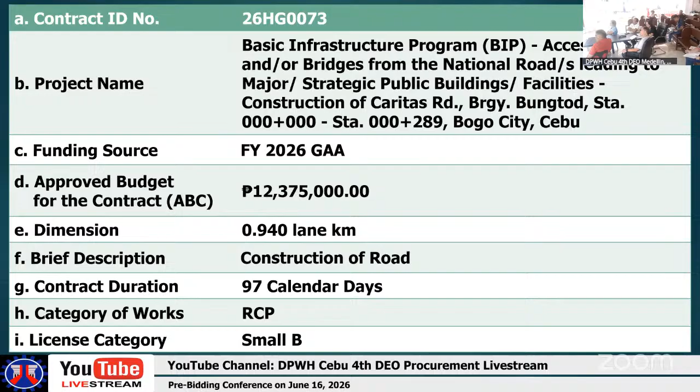Good morning everyone. Summary of quantities: Part A, Facilities for the Engineer; Part B, Other General Requirements; Part C, Earthwork; Part D, Sub-base and Base Course; Part E, Miscellaneous Structures; Part G, Drainage and Slope Protection Structures; Part H, Miscellaneous Structures. Next is the drawing.

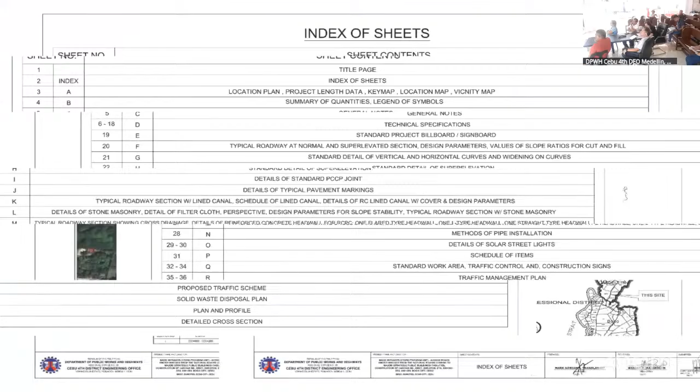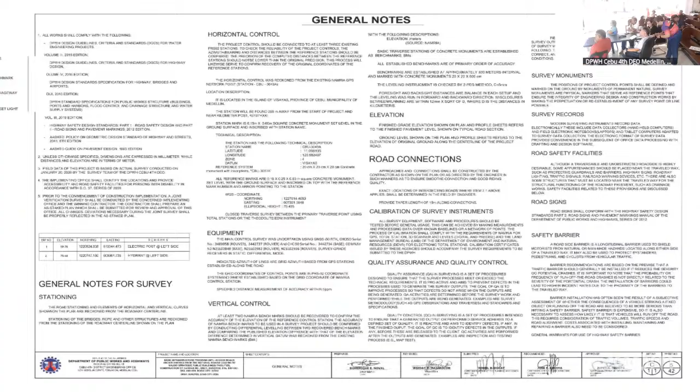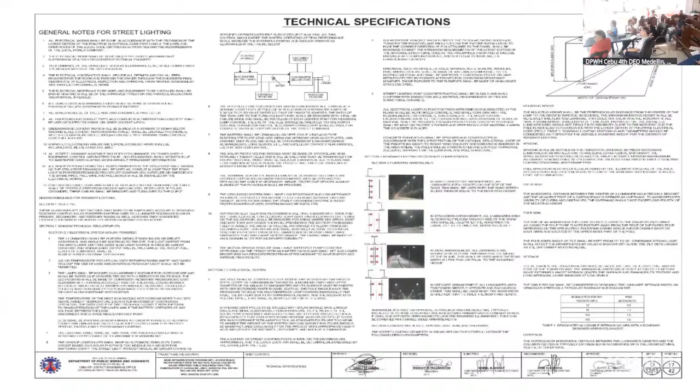First page is the title page. Next is the index of sheets, the location plan, the summary of quantities, general notes, and the following technical specifications. Next is the standard billboard, then the typical roadway, and typical pavement marking details.

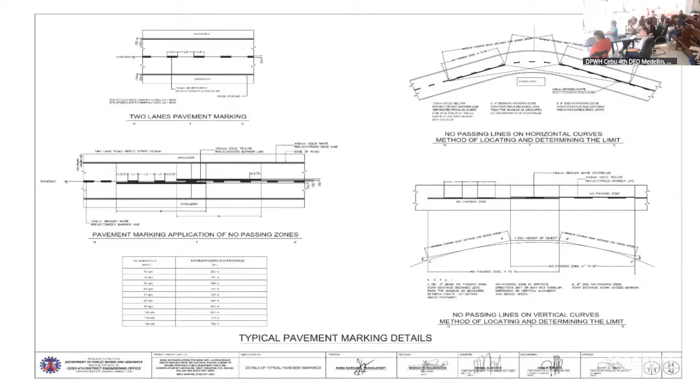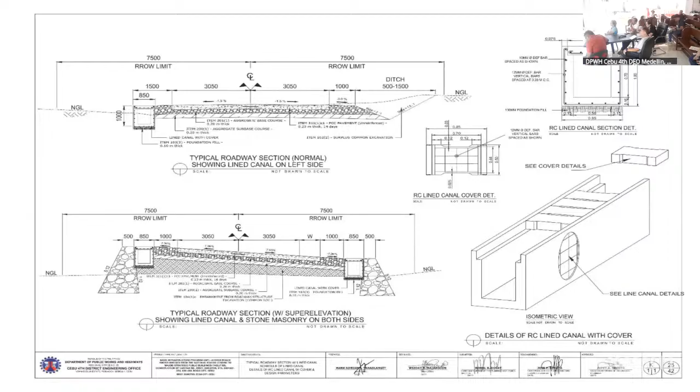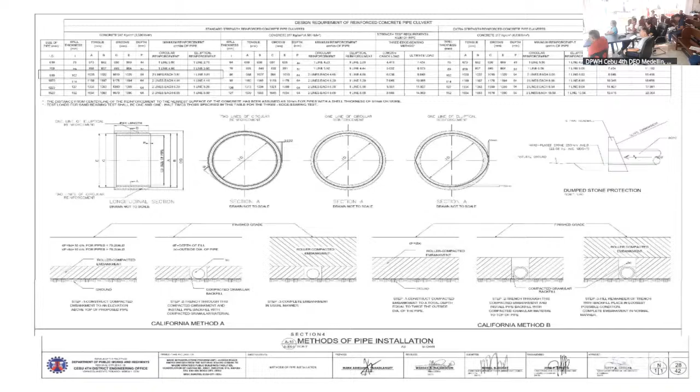The typical details of the stone masonry lined canal. Next is the stone masonry, then the head wall of the cross drain, and the street light typical and details.

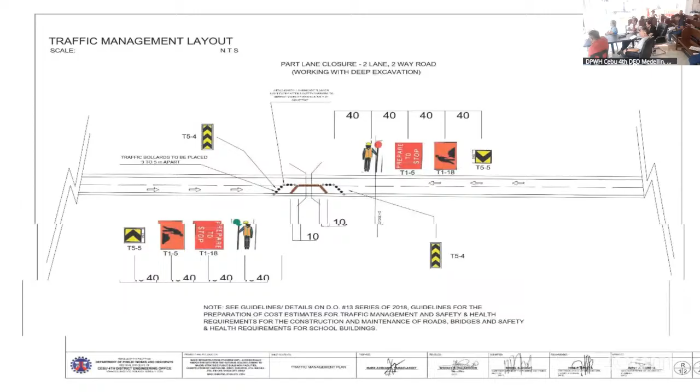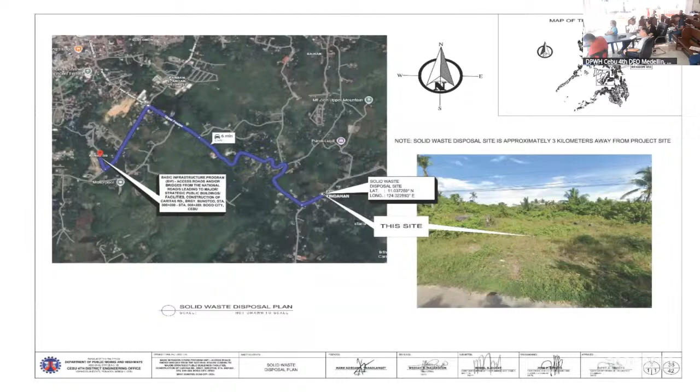Then the schedule of items, regulatory signs, the traffic management layout, the proposed traffic scheme, and the disposal waste plan. Finally, the plan and profile, and the cross-sections of the project.

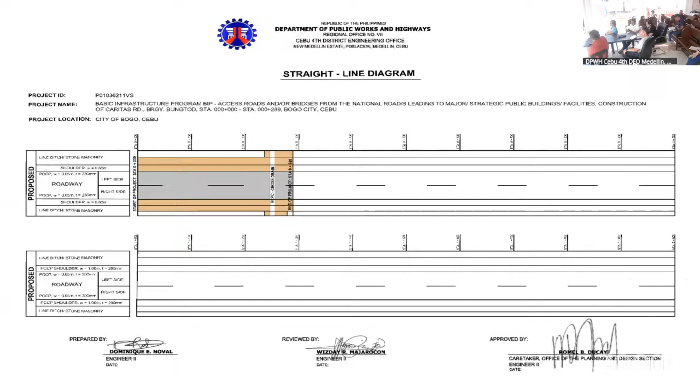Next is the straight line diagram. That's all for the drawings.

Next is the equipment requirements. First is 2 units of two-way radio, 8 units of barricade flasher light, 1 unit of low-bed trailer with prime mover, 1 unit of backhoe, 2 units of dump truck, 1 unit of bar cutter, 1 unit of bulldozer, 2 units of payloader, then 1 unit each of: motorized road grader, vibrator roller, water truck, and 2 units of concrete vibrator, 1 unit each of: concrete screeder, concrete saw, bar cutter, joint crack sealer machine, bar bender, cargo truck 9 to 10 metric ton capacity, 1 bagger mixer, bar cutter, plate compactor, backhoe wheel type, cargo truck 2 to 5 metric ton capacity, applicator machine, kneading machine, bar bender, truck mounted crane, straight boom lift telescopic.

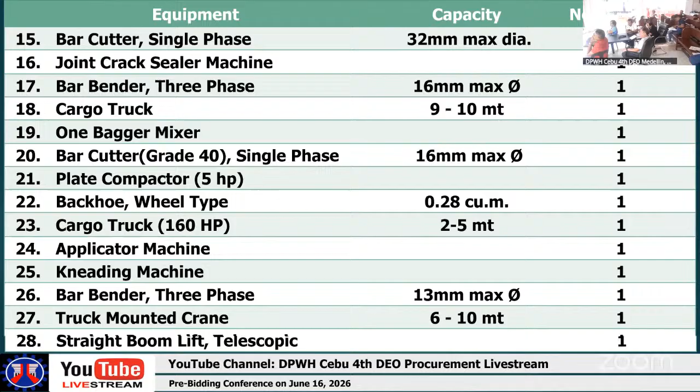Then that's all for this project.

For project profile number 2, to be presented by Engineer Renato J. Catino.

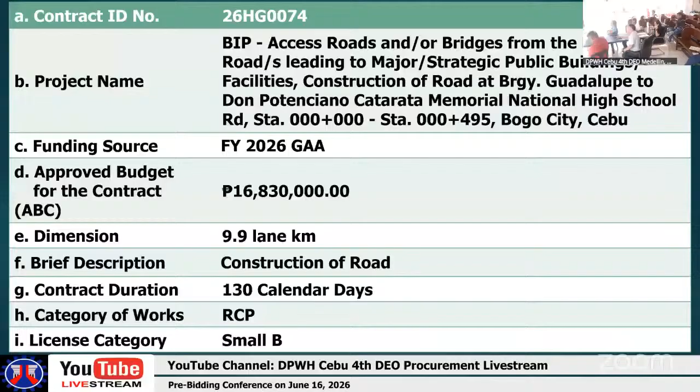Summary of contents: Item number, Part B - other general requirements, Part C - earthwork, Part D - subbase and base course, Part E - surface courses, Part G - drainage and slope protection structure, Part H - miscellaneous structures, drawings.

Title page, location map, summary of documents, general notes, technical specifications.

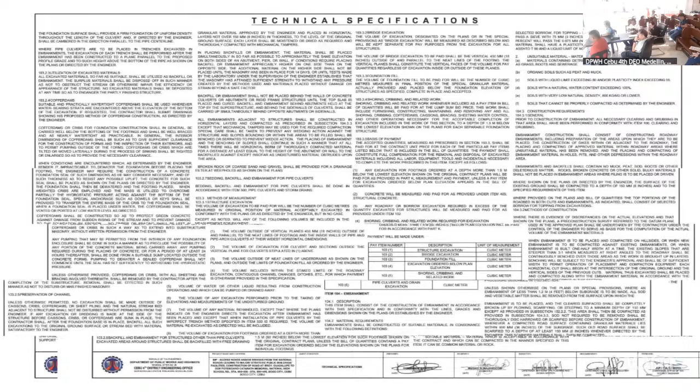Schedule of items. Typical roadway section. Details of stone masonry. Standard details of pavement markings. Standard masonry drawing.

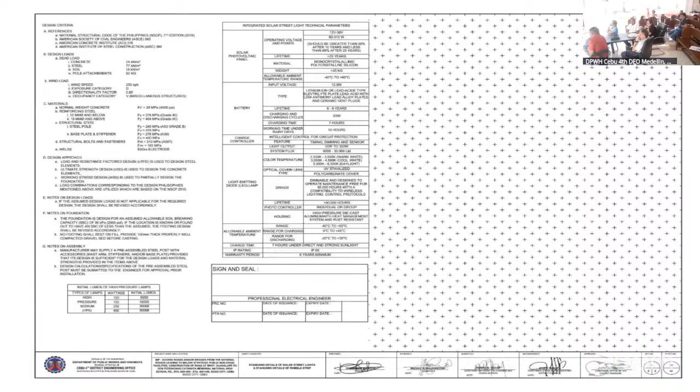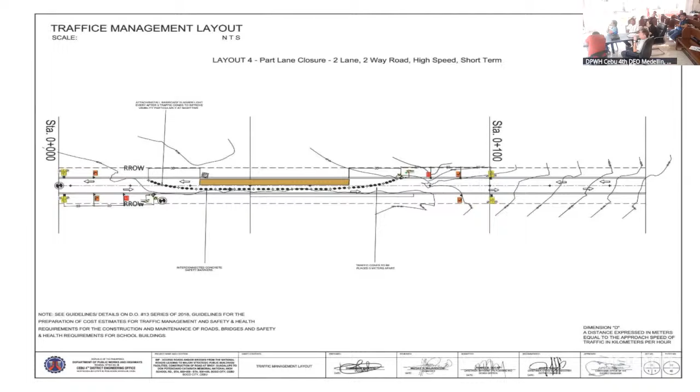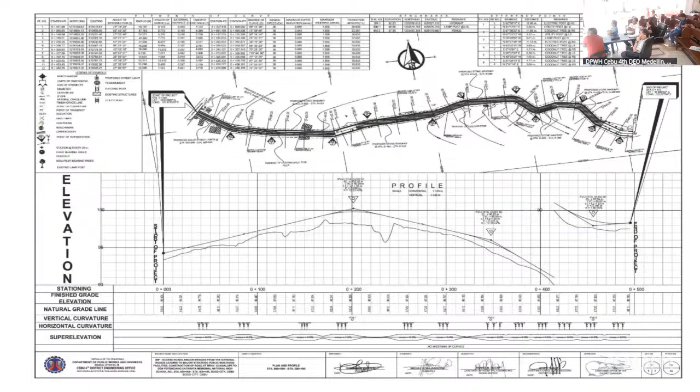Straight line diagram. Equipment requirements.

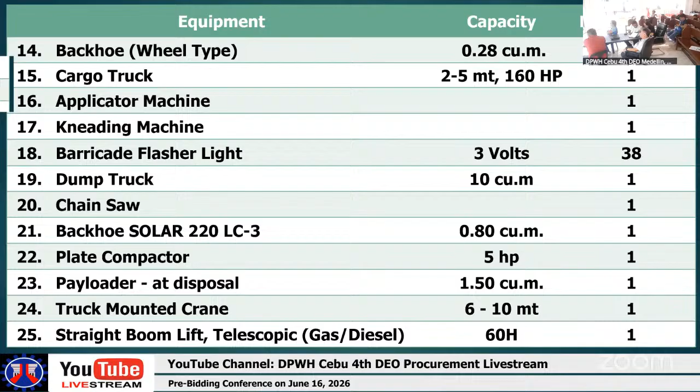1 unit backhoe, cargo truck, applicator machine, kneading machine, barricade flasher, dump truck, chainsaw, backhoe solar, compactor, payloader at disposal, truck mounted crane, straight boom.

For project profile number 3 to be presented by Engineer Marinito Yin.

To be discussed in details by Engineer Clark Brgy.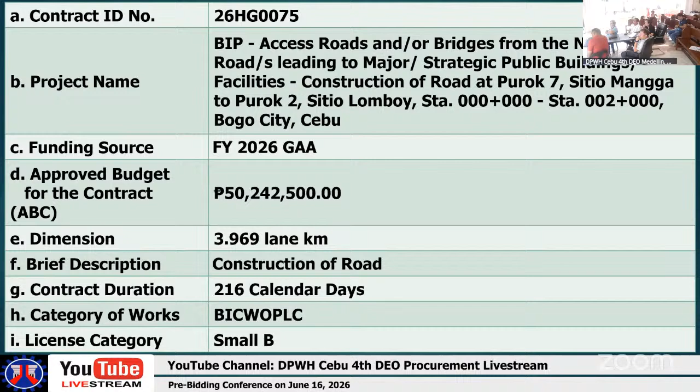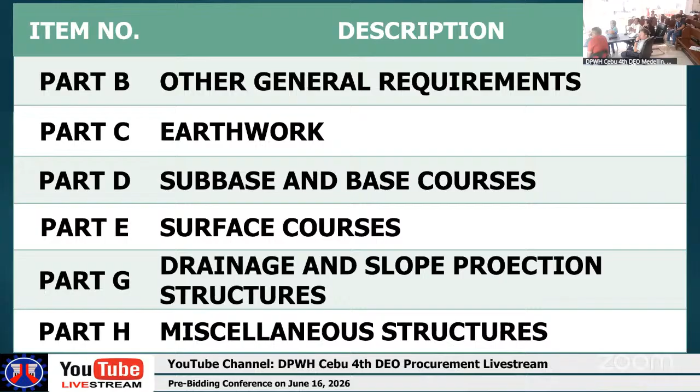Summary of contents: Part B - other general requirements, Part C - earthwork, Part D - subbase and base courses, Part E - surface courses, Part G - drainage and slope protection structures, Part H - miscellaneous structures, drawings.

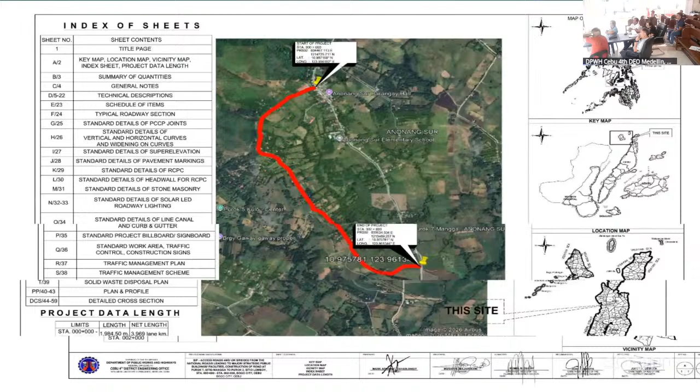Title page, index of sheet, location map, project data, then summary of quantities, general notes, and the following are the technical specifications.

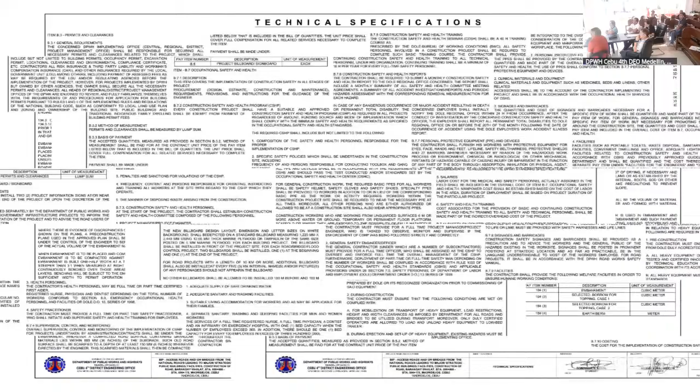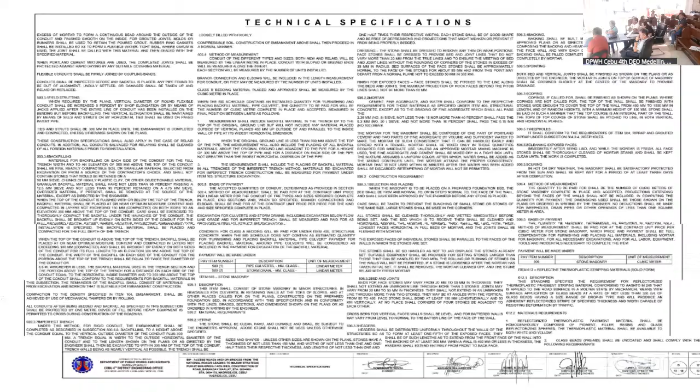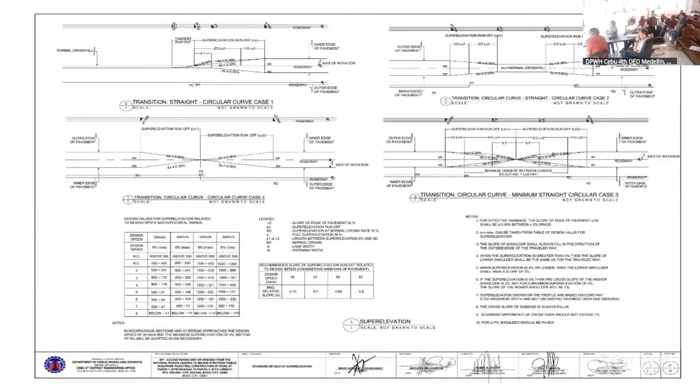Schedule of items. Typical road section. Standard details of PCCP joint. Standard details of vertical and horizontal curves. Standard details of super elevation. Standard details of pavement markings.

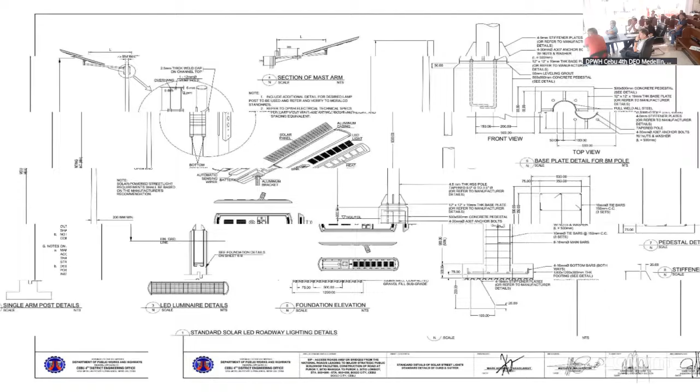Standard details of RCPC. Standard details of stone masonry. Standard details of street light. Standard details of line canal and curb gutter.

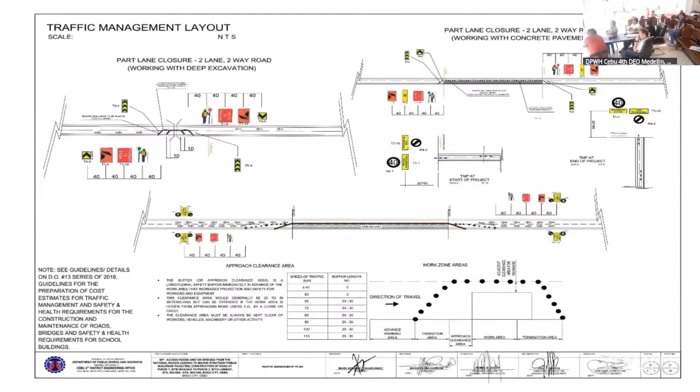Standard project billboard, construction signs, traffic management layout, traffic management scheme, solid waste disposal plan, plan and profile, and the detailed sections.

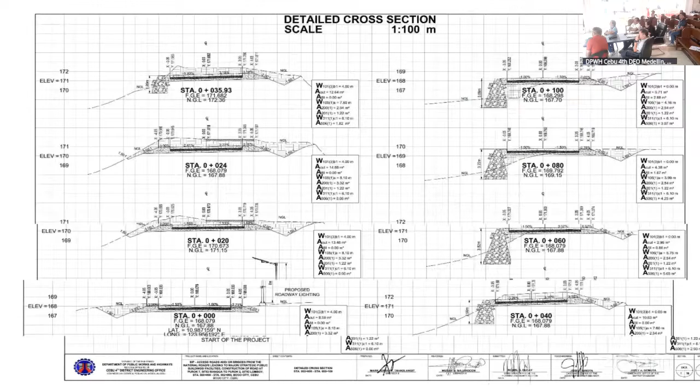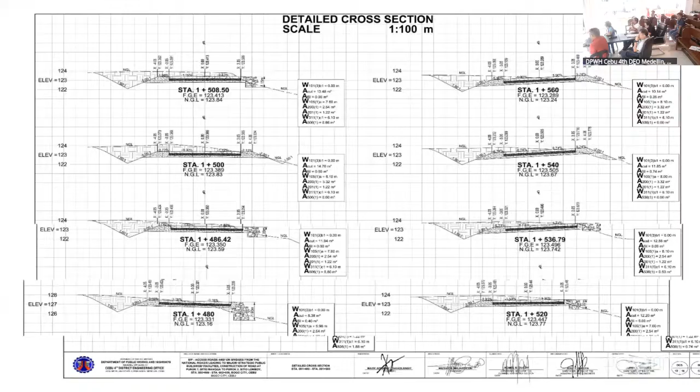Straight line diagram. Equipment requirements: 1 unit backhoe, 2 units of dump truck, 1 unit each of the following: chainsaw, backhoe.

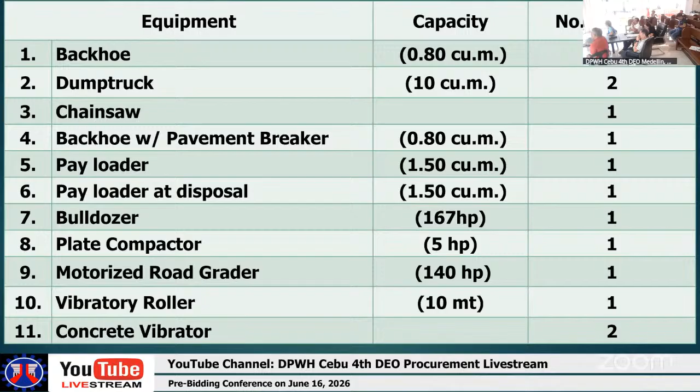For project profile number 4 to be presented by Engineer Teresita Iscaliar.

For project report, contract ID number 26HG0076, BIP - access roads and bridges from the national road, DPWH strategic public buildings, facilities, construction of roads, Station 003 plus 884 to Station 004 plus 059 in Tabuelan, Cebu.

Funding source FY 2026, approved budget for the contract is 4,796,550.

Dimension 0.35 lane km, brief description: construction of road, contract duration 45 calendar days, category of works RCP, license category small B, to be discussed in details by Engineer Teresa May.

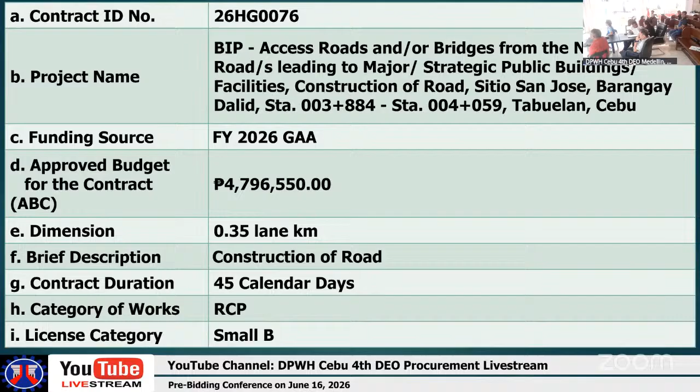Summary of quantities. Part B - other general requirements. Part C - earthwork. Part D - sub-base and base courses. Part E - surface courses. Part H - miscellaneous structures.

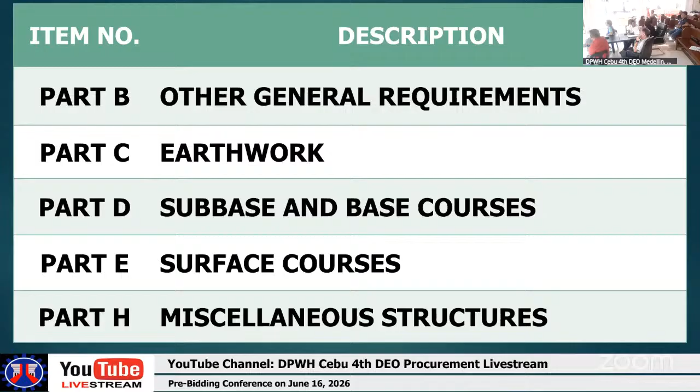Drawings. First page is the title page. The location map. Summary of quantities and index of sheets. General notes. Technical specifications.

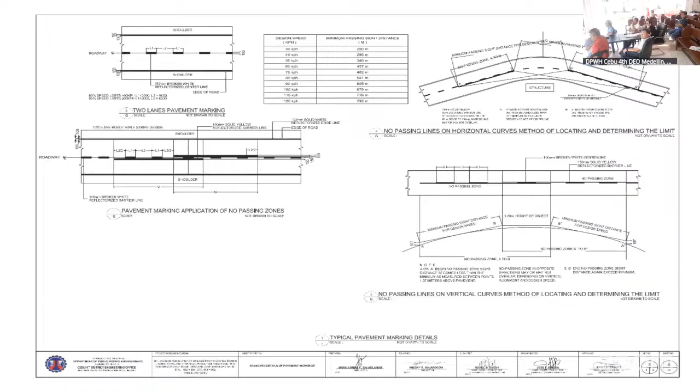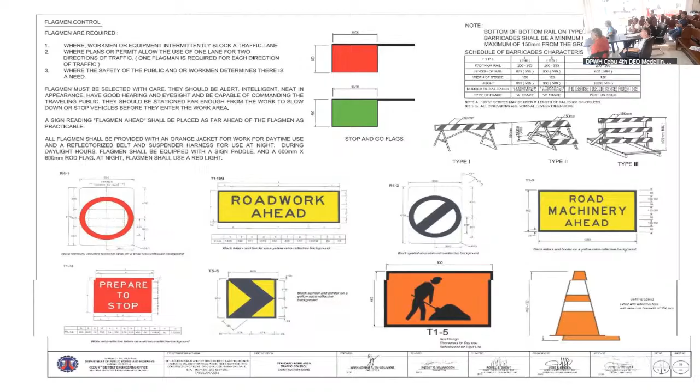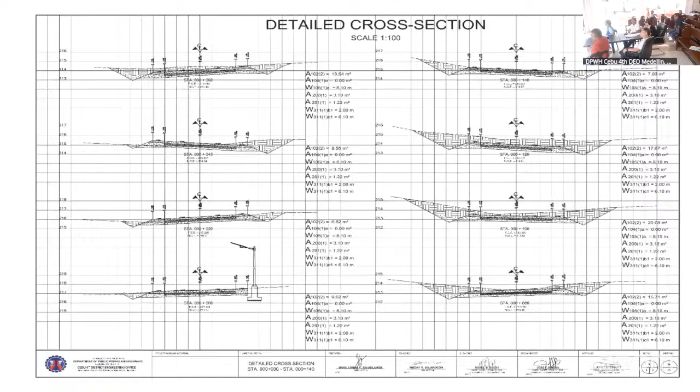Standard work area traffic control and construction signs, standard project billboard, standard traffic management layout, traffic management scheme, solid waste disposal map, plan and profile, detailed cross-section of the project, and straight line diagram.

Project profile number 5 to be presented by Engineer Mel B. Lupay.

For project profile number 5, contract ID 26HG0077. Project name: construction of multipurpose building, Astrodome Phase 2, Barangay Agujo, Daanbantayan, Cebu, with coordinates 11.257952 and 124.005949. Funding source: FY 2026 approved budget for the contract, 49,500,000. Dimension: three-story building, with description of construction of multi-purpose building, as per the contract duration of 185 calendar days.

Category of works: BICWOPLC, license category small b. To be discussed in details by Architect Jericho Espinosa.

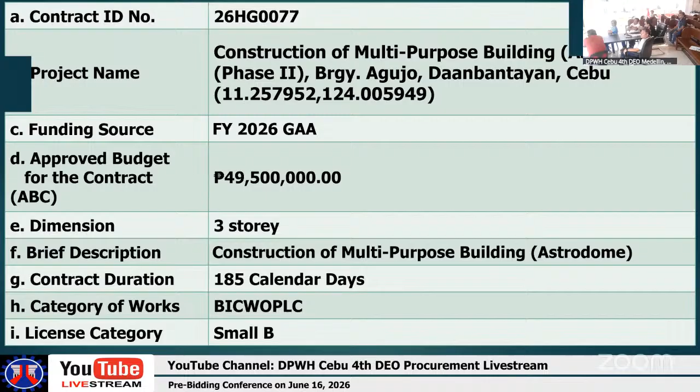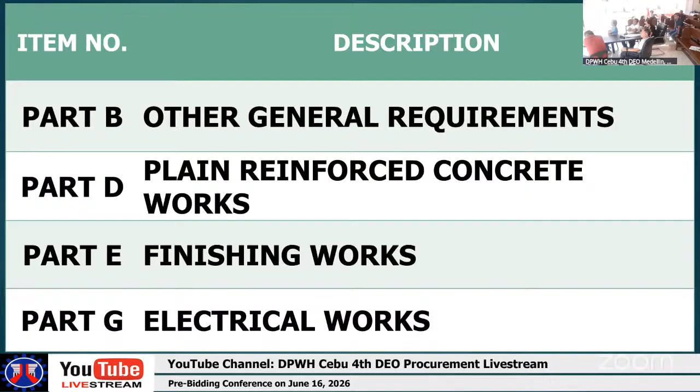Summary of quantities: Part B, other general requirements; Part D, plain reinforced concrete works; Part E, finishing works; Part G, electrical works. Drawings.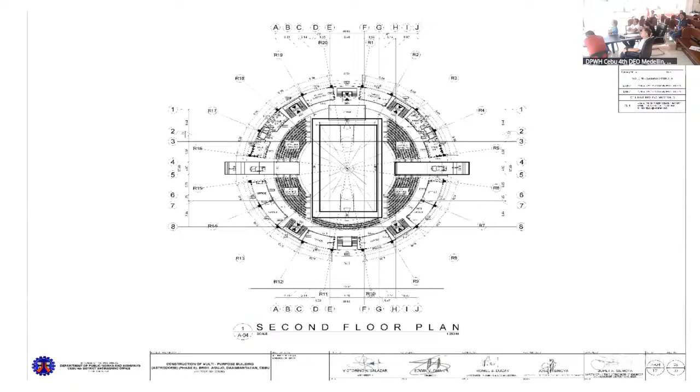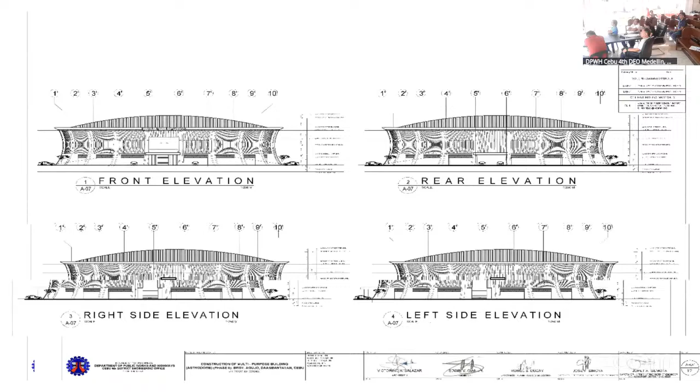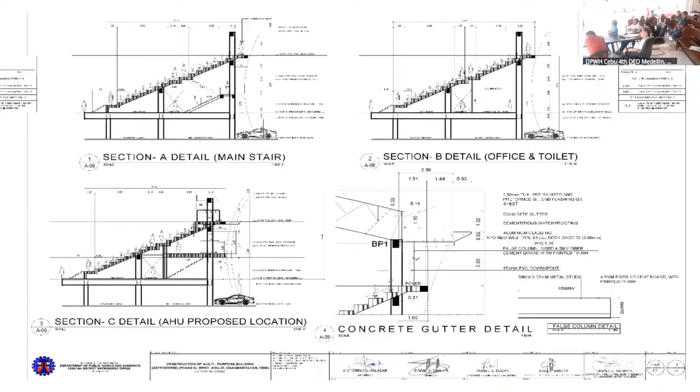Second floor plan, third floor plan, roof plan, the elevations, the cross section, longitudinal section, window structures, other section details or big other details, and the reflected ceiling plan.

General construction notes, roof beam framing plan, roof framing plan, and the truss details.

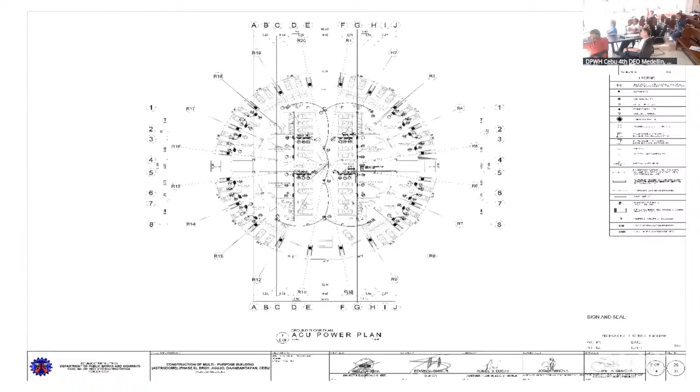The electrical plan, site development plan for the electrical, the lighting layout, power layout, ACU power plan, powerhouse plan, the short circuit and voltage drop calculation, single line diagram, the grounding plan, and schedule of loads.

Equipment requirements: backhoe 1 unit, dump truck 1 unit, plate compactor 1 unit, concrete pipe breaker 1 unit, concrete mixer 1 unit, 1 bagger mixer, bar cutter, bar bender 1 unit, welding machine 2 units, cutting outfit 1 unit, truck mounted crane 1 unit, and jackhammer 2 units.

Project profile number 6 to be presented by Engineer Marianito Jimen.

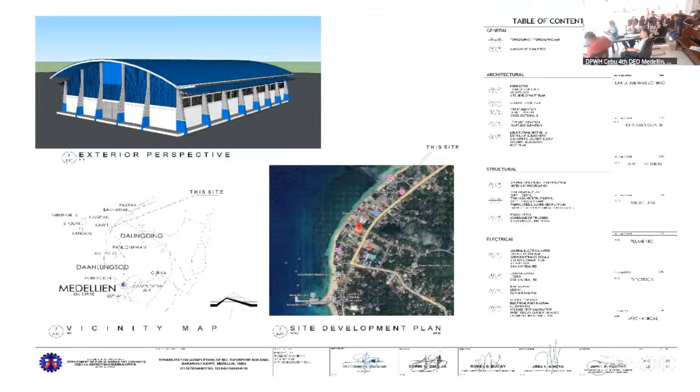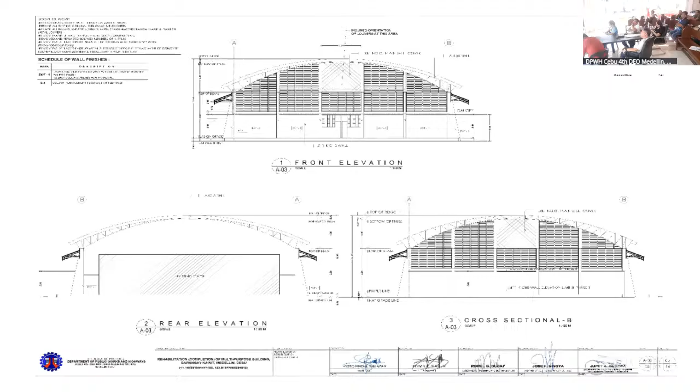Title page, the exterior perspective, vicinity and site development plan, topographic map, summary of quantities, the ground floor plan, the elevations and cross section, and the detail of fixtures and concrete hollow block.

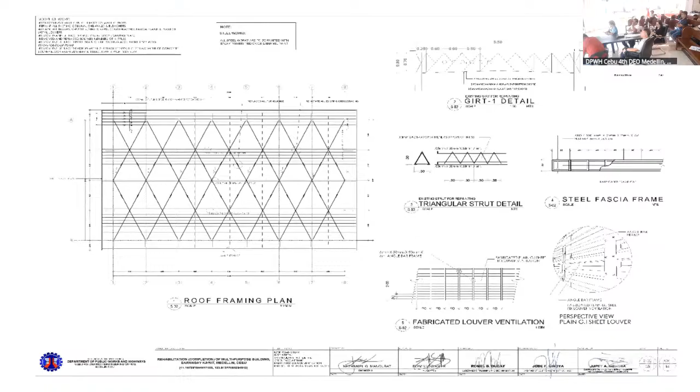General construction notes, structural roof framing plan, the truss detail, blow-up column detail, and the general electrical notes.

The lighting layout, power layout, the schedule of loads, equipment requirements: 1 unit concrete vibrator, 1 bagger mixer, 1 unit bar cutter, 1 unit bar bender, 2 units welding machine, 1 unit cutting outfit, 1 unit truck mounted crane. Thank you.

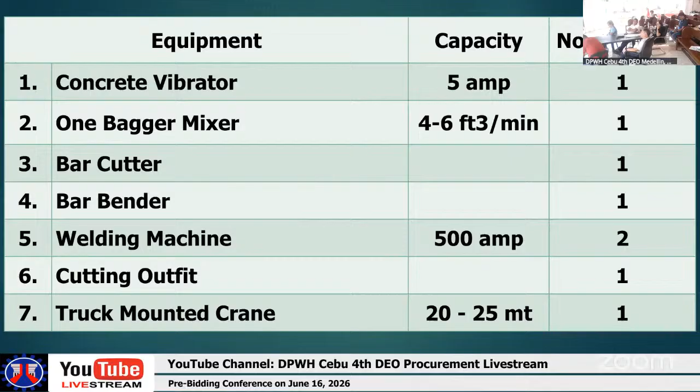For minimum materials testing equipment requirements, please refer to DPWH Department Order number 11 dated January 24, 2017, with the subject of inclusion of the minimum materials testing equipment in the technical component of the bid.

For the requirements for key personnel of the aforementioned projects, we require 1 personnel each as project manager, accredited project engineer, and accredited materials and quality control engineer, and foreman, with 3 minimum years of similar experience in the same position and 5 minimum years of similar and related experience.

The plans and drawings of these projects are already downloadable and made available on the project's websites.

The Class A documents are the legal, technical, and financial documents. Legal documents are: number 1, registration certificate from SEC, DTI for sole proprietorship, or CDA for cooperatives; number 2, mayor's permit issued by the city or municipality where the principal place of business of the prospective bidder is located; and number 3, tax clearance certificate as finally reviewed and approved by the BIR.

For the technical documents, still part of Class A documents, are: first, PCAB or special PCAB license, and in case of joint venture, a valid special PCAB license and registration for the time and cost of the contract for this project as required; second, records of all ongoing government and private contracts, including awarded but not yet started projects; and third, records of single largest completed contract, SLCC, similar to the contract to be bid.

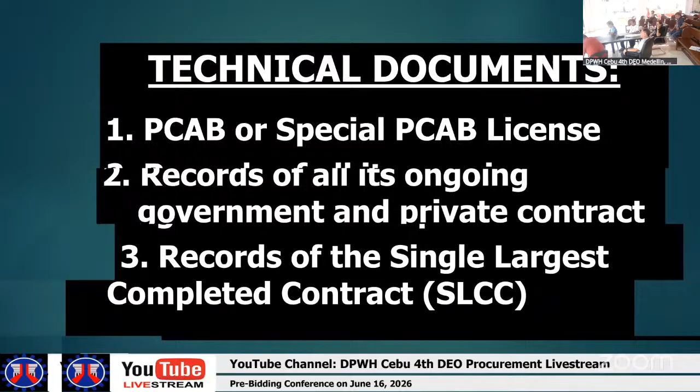For financial documents, still part of the Class A documents: an audited financial statement stamped received by the BIR or its duly accredited and authorized institutions, and an NFCC of at least equal to the ABC. This comprises the Class A documents.

For the Class B documents, these are only applicable for joint ventures. Thus a valid joint venture agreement, JVA, is required, where each partner of the joint venture shall submit the respective PhilGEPS certificates of registration. Submission of technical and financial eligibility documents by any of the joint venture partners constitutes compliance, provided that the partner responsible to submit the NFCC shall likewise submit the statement of all its ongoing contracts and audited financial statements.

For the submission and receipt of bids for the procurement of civil works projects, the first envelope or technical proposal requires the following documents: PhilGEPS certificate of registration and membership, PCAB license and registration or special PCAB license, statement of all ongoing government and private contracts, statement of SLCC, NFCC computation, JVA if applicable, omnibus sworn statement, and bid security in the prescribed form, amount, and validity period.

For the arithmetical corrections: bid prices in figures versus words, words prevail. Total price per item versus unit price per item, unit price prevails. Total price versus actual sum of component items, actual sum prevails. Unit cost in detailed estimate versus unit price in the BOQ, BOQ prevails. And if above the ABC, the bid is disqualified.

For the legal requirements: licenses, certificates, permits, agreements, and inclusion in any blacklist. For financial requirements: bid security, bid price proposal, and NFCC. For technical requirements: key personnel, availability and commitment of major construction equipment, performance on ongoing government and private contracts, and authenticity and correctness of bid security.

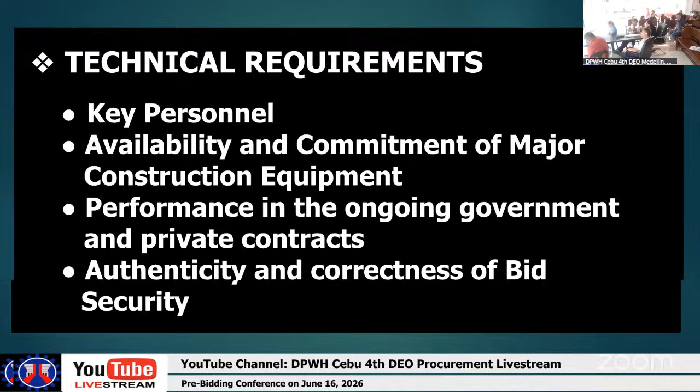For the post-qualification procedure, within a non-extendable period of 5 calendar days from receipt by the bidder of the notice from the BAC that it submitted the lowest calculated bid, the bidder shall submit its latest income and business tax returns filed and paid through the BIR electronic filing and payment system, and other appropriate licenses and permits required by law and stated in the BDS. The DPWH will verify, validate, and ascertain all statements made and documents submitted by the bidder.

For the awarding of contract, the contract shall be awarded to the bidder whose bid has been determined to be the lowest calculated and responsive bid, LCRB, as a result of the detailed evaluation and post-qualification conducted. Contract award should be made within the bid validity period.

For questions and clarifications on the project subject in this pre-bidding conference, bidders are advised to send their letter on or before the 17th day of June 2026, addressed to Engineer Shari Villegas, Quality Assurance Chief and BAC Chairman, or to Inadi Hajaral, Procurement Engineer, at our office address, or email us at electronicbids_4@dpwh.gov.ph.